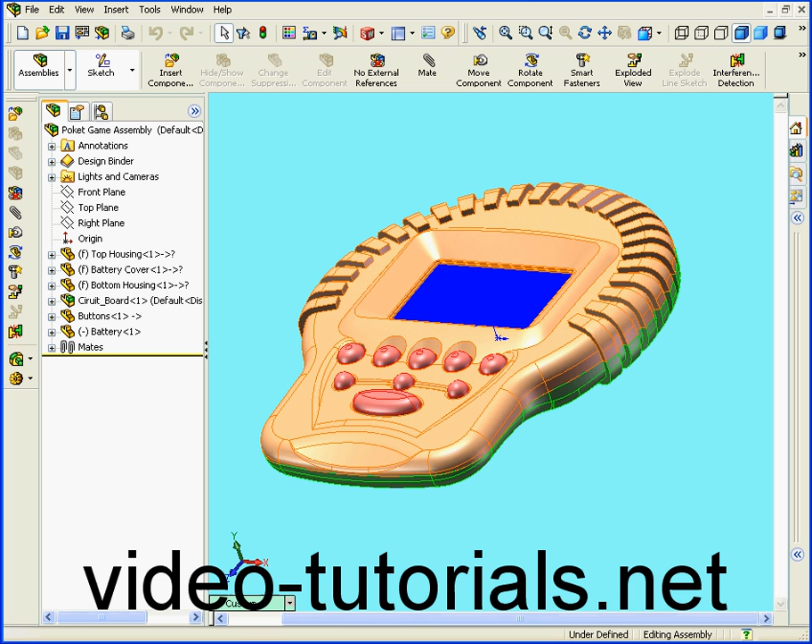Welcome to the final segment of our Pocket Game project. In this tutorial, we'll be finishing the LCD opening. Let's right-click on the top housing and select Edit Part. Let's expand the feature tree.

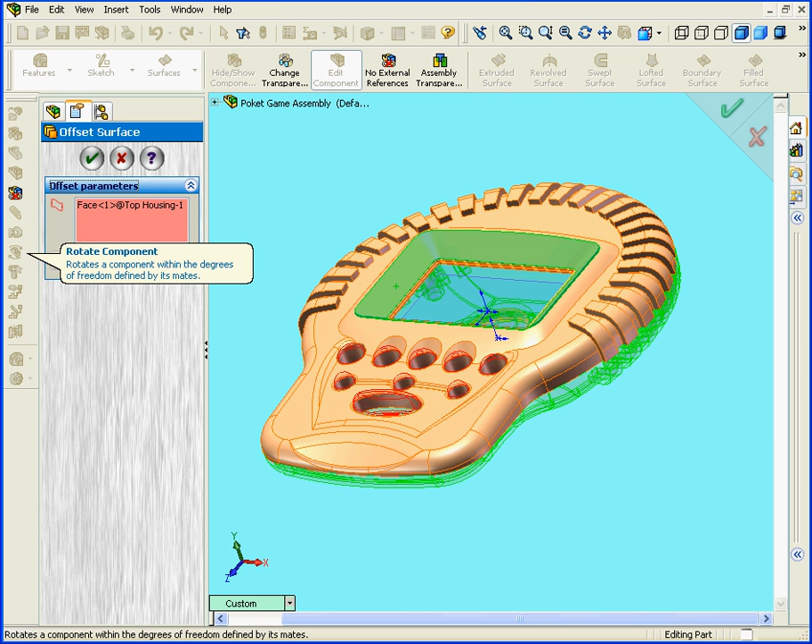Next, I'm going to offset this surface. I'll offset it by 0.5 millimeters. Tab. Let's reverse the direction also. Click OK.

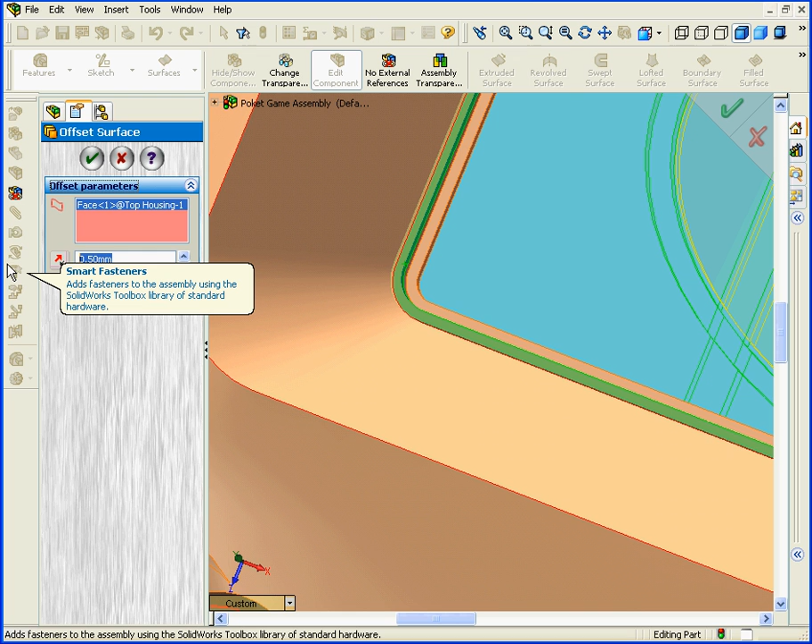Let's offset another surface now. Activate the Offset tool. There's something pre-selected here. Let's delete it. Let's select the surface we want. We'll enter a 0 offset distance value. Tab. And click OK.

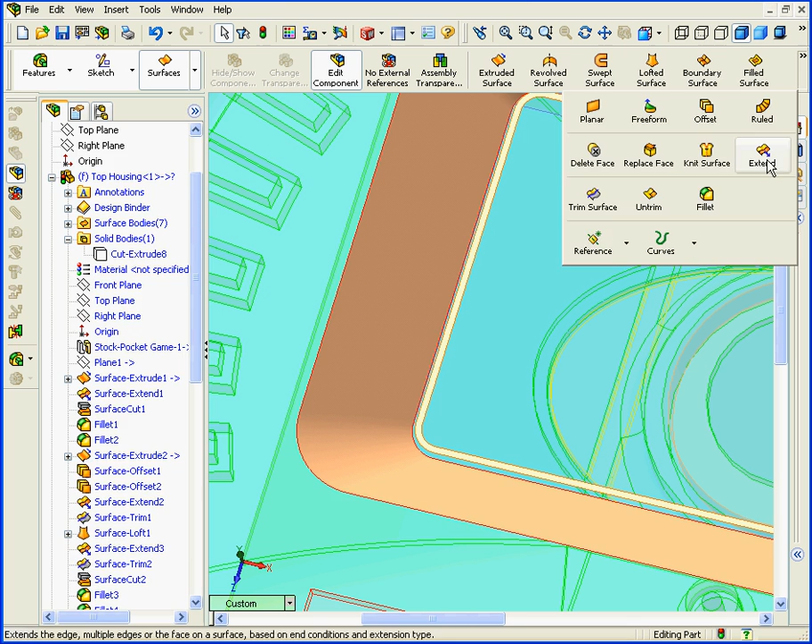Alright, let's hide our solid body. Expand the solid bodies folder, right-click, and hide. Next, we'll need to extend this surface. Activate the Extend tool. Click on this edge. Under End Condition, choose Up to Surface. Now we select the surface to which we'll extend,

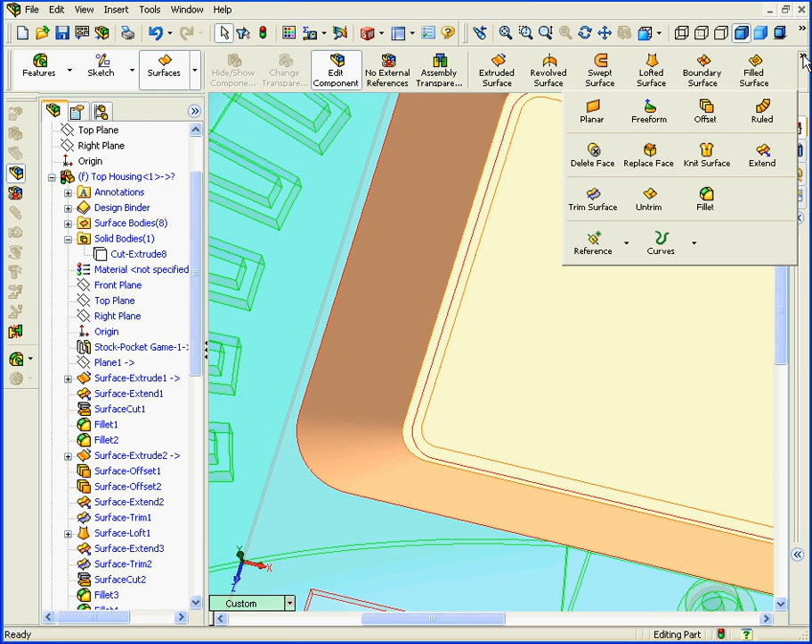and click OK. Next, let's activate the Planar tool and create a planar surface right here. Click OK. Now we'll activate the Knit Surface tool, and we'll knit these two surfaces together.

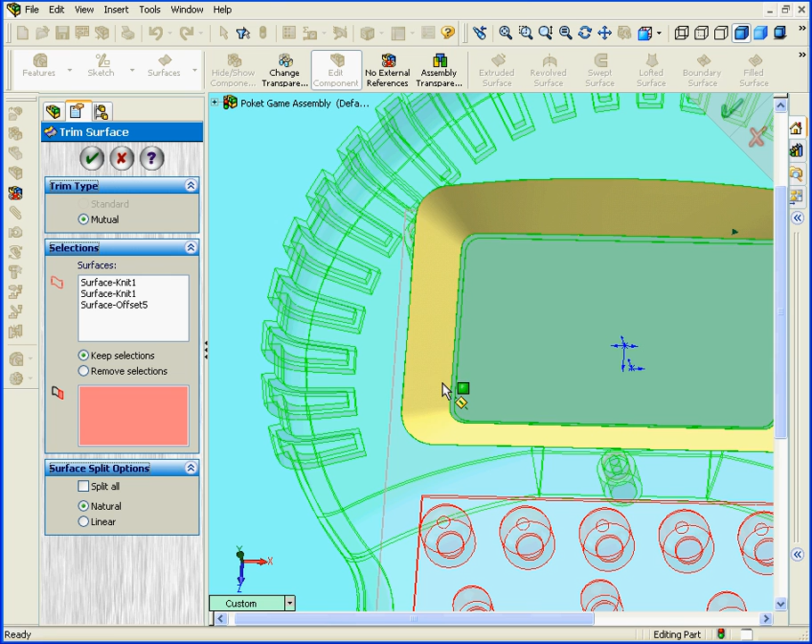Finally, I'm going to activate the Trim Surface tool. Let's select the Mutual Trim type. Let's select these surfaces. In the Keep Selections area, let's keep this surface and click OK.

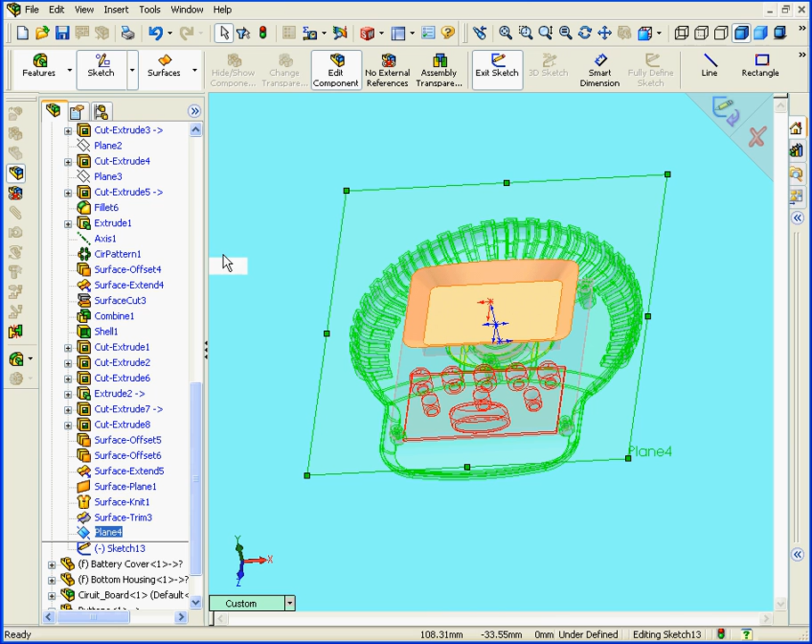OK, let's zoom out. Next, let's insert a plane that's parallel to the top plane. Select Top. We're going to offset the plane by 12 millimeters. Let's check to make sure it goes in the right direction, and click OK. Now let's right-click on our new plane and insert a sketch. We'll take a top view.

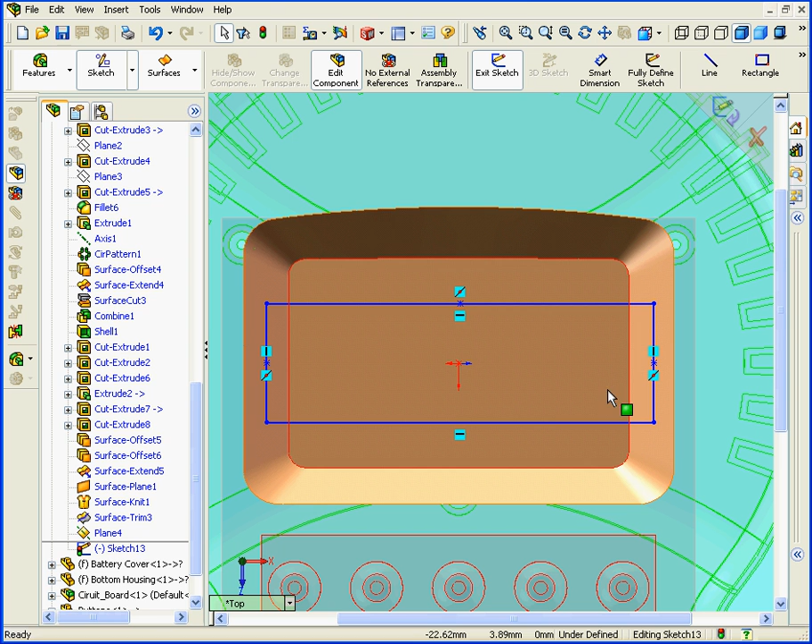Next, let's activate the Rectangle tool. Right-click and select. Activate the Point tool. We'll insert points here, here, here, and right-click and select. Now Shift-select this point, and add a vertical relationship. Shift-select this point, and add a horizontal relationship.

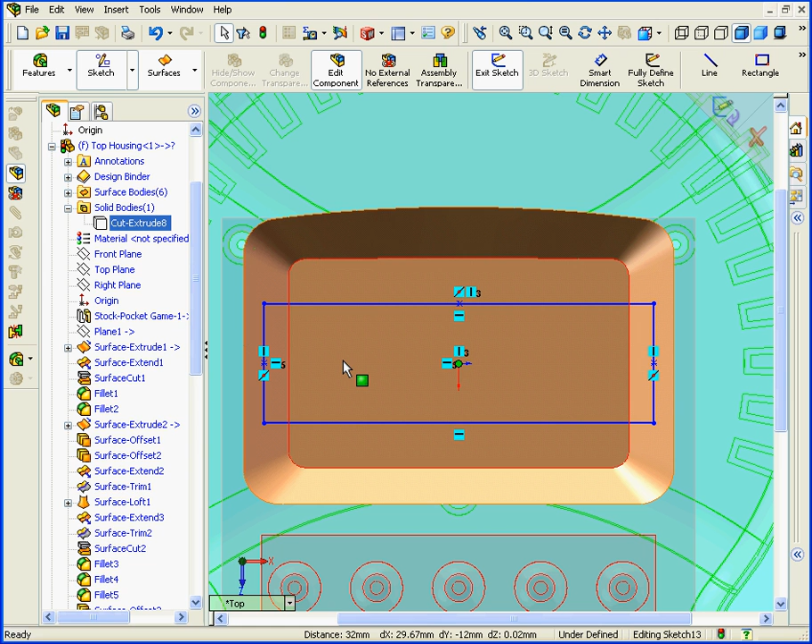Oops, I pressed vertical by mistake. We'll need to delete that. And let's add a horizontal relationship. And click OK. Now we'll activate the Line tool to connect these 2 points. Right-click, select.

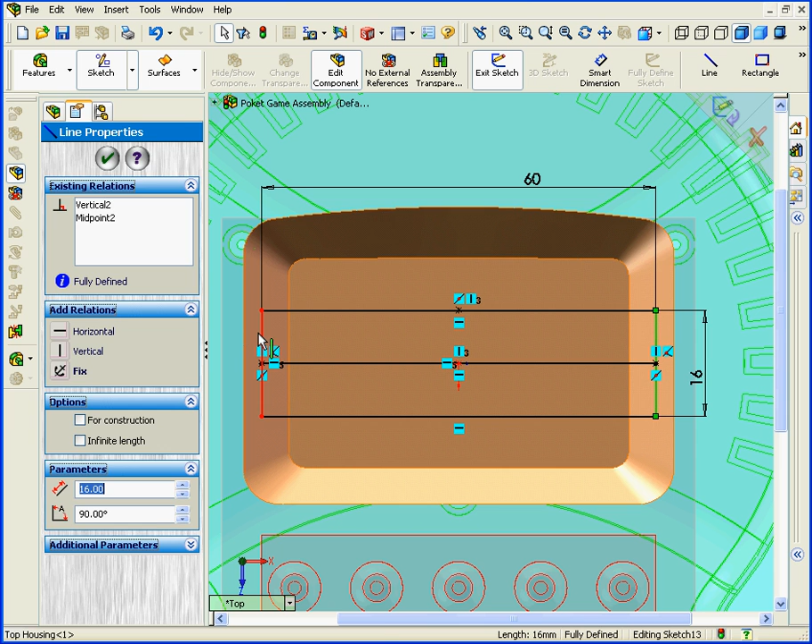Let's Smart Dimension. 60 millimeters here. OK. Here, let's enter a value of 16 millimeters. OK. And OK. Now let's Shift-select these 2 lines and convert them to construction geometry.

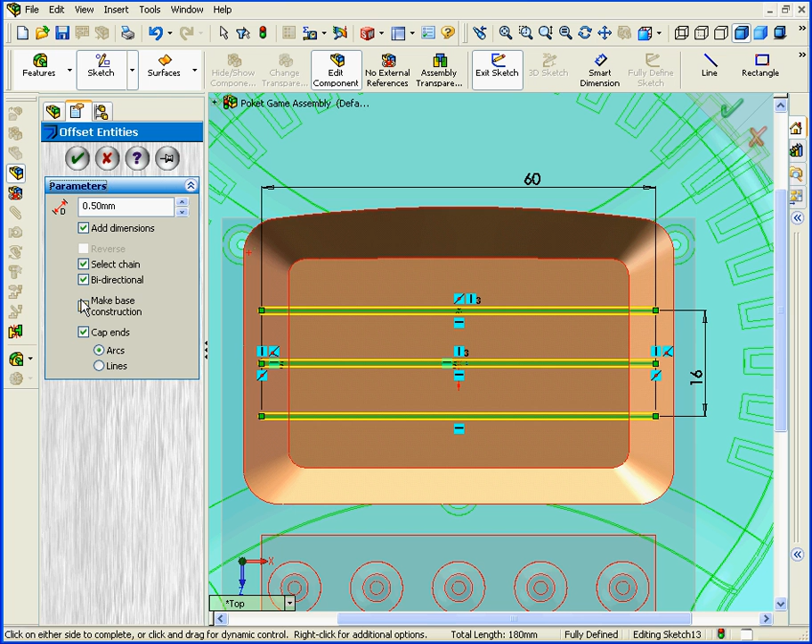Next, I'll Shift-select these 3 lines and activate Offset Entities. Offset distance, let's enter a value of 0.5 millimeters. Tab. Let's keep the Cap Ends checkbox and the Make Base Construction checkboxes checked. Click OK. Now let's bring back our solid bodies. Right-click and Show.

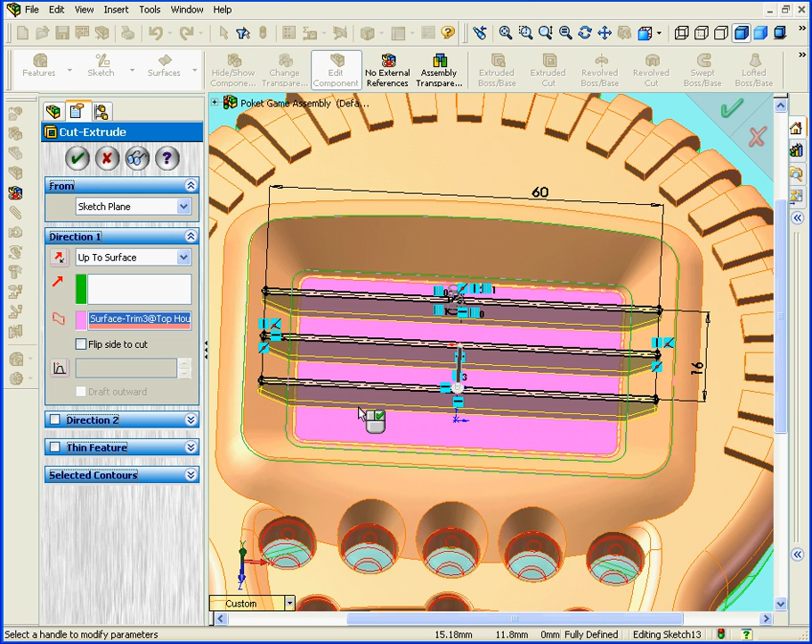Next, we'll make an extruded cut. Let's activate the Extruded Cut tool. From the End Condition drop-down menu, let's choose Up to Surface. And in our surface selection area, we'll select this surface. Click OK. Let's hide this surface. Right-click and hide.

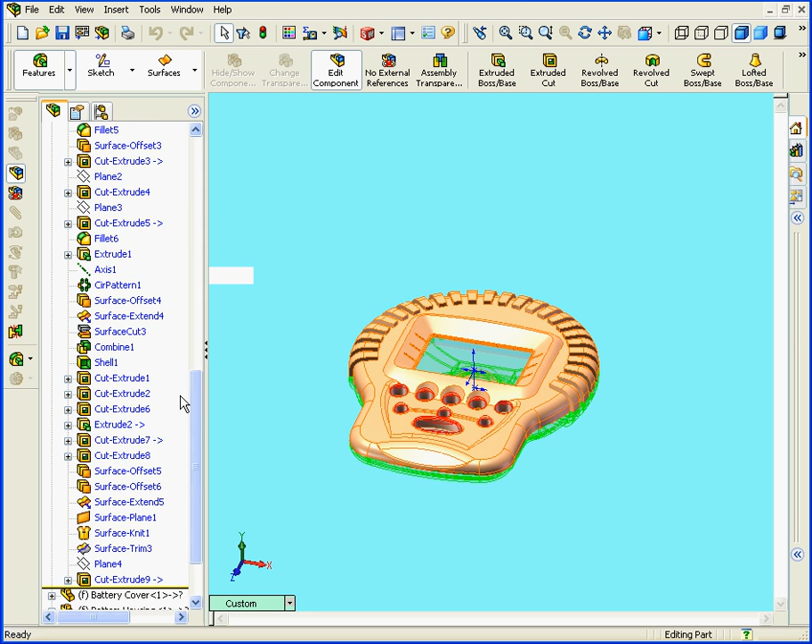Okay, let's rebuild our assembly. And let's hide this plane. Right-click and hide. Let's edit the assembly. Right-click, Edit Assembly. Okay, it looks good. And this completes our Pocket Game project. We hope you've enjoyed this practical application of SolidWorks to a real-life project.